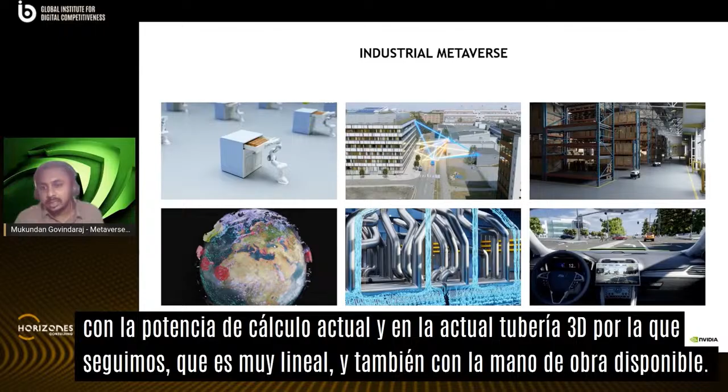So there is an immense need for accelerating the current 3D world creation process. The volume of 3D worlds that we'll be creating in the next several years is nearly impossible with the current computing power, the current 3D pipeline we are following, which is very linear, and the available manpower. We are spending a lot of our valuable time and effort on repetitive world-building tasks.

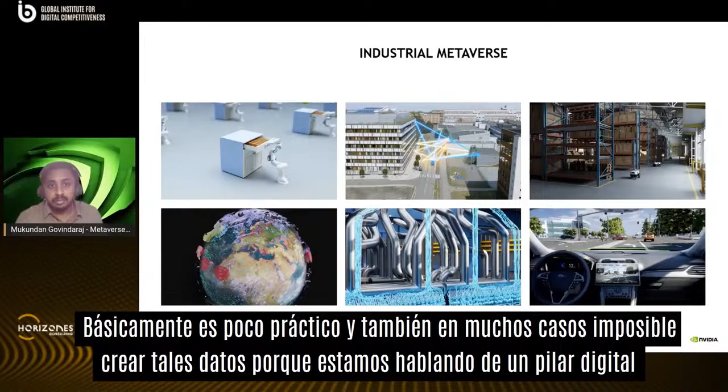Industrial AI also requires 1:1 scale, diverse, and accurate data in order to create these true digital twins. It's impractical and in many cases impossible to create such data, because we are talking about a digital twin where the foundation is not laid even in the real world. The only way to produce such data is by synthesizing it.

And for the AI to be really successful in creating this data, we need to train it in a virtual environment which is not only a visual replica of the real world, but also obeys all the laws of physics, to the extent that whatever you simulate in the virtual world will be a true replica, a true digital twin of your real world.

I would like to talk about the major challenges we are facing in the current industry, especially for those involved in building 3D worlds or digital twins. Firstly, we have already shifted towards a hybrid working model where a lot of us are working remotely and most of our teams are spread across the globe. We are in dire need of collaborating seamlessly like we would in the real world.

The 3D process by itself is a very complex process. People who are working on it, I'm sure, can relate to it.

The process is linear, which means you start with modeling, then texturing, rigging, animation. The file has to go through literally several departments before it can be handed over to the developers. And then when there are feedbacks and changes, you again have to take it back to ground zero, start making all the changes and then pass it on. So this is extremely time consuming and it burns a lot of energy.

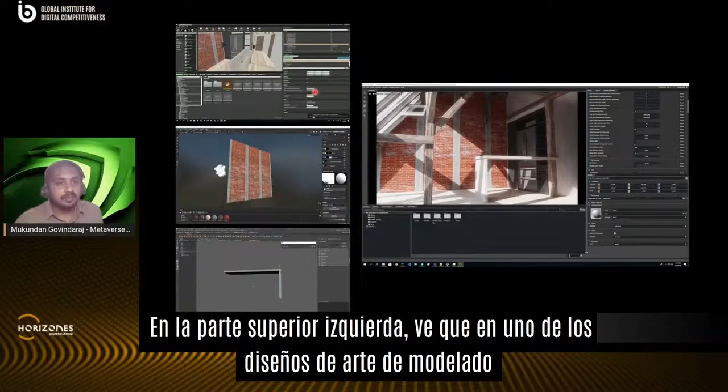Here is a quick video which will give you some insights on how real-time collaboration would work. On the top left, you see one of the modeling artists, a level design artist who is working on setting the levels. And right here, one of the texturing artists is using Substance Painter to create some beautiful artwork. And beneath that, we see one of the modelers who's creating a model on the fly.

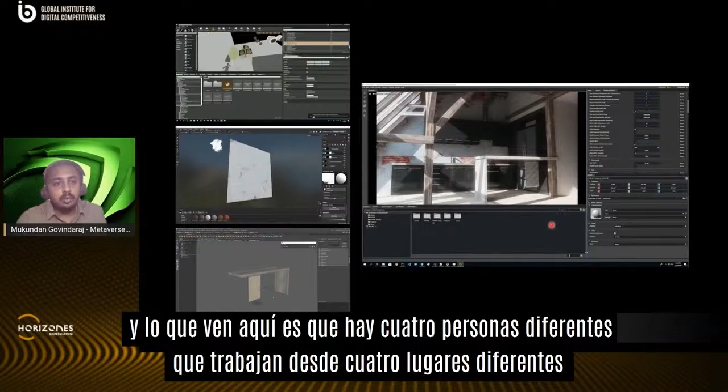Right here, the entire level designing and the lighting is taken care of in Omniverse Create. What you see here is 4 different people working from 4 different places using 4 different tools, but all the interaction and collaboration happens seamlessly. Which means it's saving a lot of time, and also boosting creativity to a different level.

Again, Kit is nothing but a powerful SDK. There are already a lot of solutions which you can use out of the box. But if you feel that there are some specific needs for your current 3D pipeline, and you want that flexibility to go and build a new feature.

Not to worry, you can simply go and start using Omniverse Kit, using which you can build an extension or a microservice, or put a lot of extensions together and create your own application. So this is a very interesting and very powerful modular kit which is available, and you'll see how powerful it is only when you start using it.

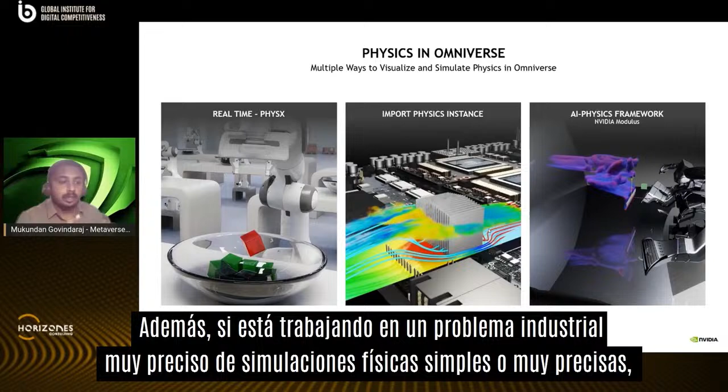So when you talk about physics, there are actually three different types. One is your real-time physics engine. Also, if you would want to import physics from different physics engines that you might already be using, some engineering physics engines, yes, you can also do that.

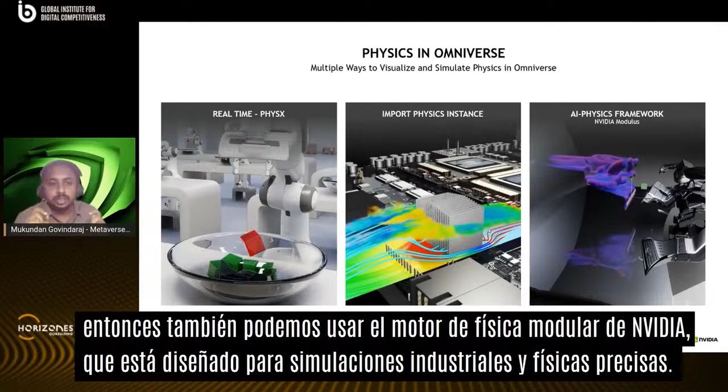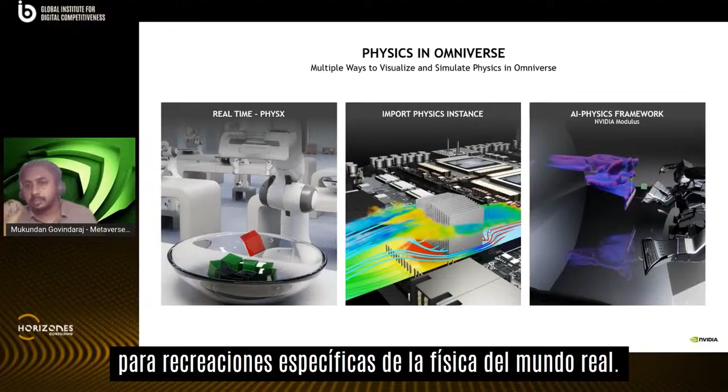Plus, if you're working on a very accurate industrial problem, which requires very accurate physics simulations, then you can also use NVIDIA's Modulus physics engine, which is built for industrial accurate physics simulations. It's very highly graphic intensive, but also very highly accurate, and a lot of clients use it for specific recreation of physical real-world physics.

So if you look at the basic physics engine, you have three types. You can work with rigid bodies or soft bodies. Plus, you have PhysX Blast, which lets you play with fracturing and disruptions. And also using flow, you can create volumetric effects, which includes fire, smoke, blast, and a lot more than that.

So once again, RTX renderer is a scalable photoreal real-time renderer, built on NVIDIA RTX tech. It's a renderer built to simulate a world as faithfully as possible, while also providing scalability to the users to increase quality. And also, you can run it across multiple GPUs at the same time, which cuts down the final time to deliver to you.

We can talk about it in detail, maybe as a follow-up session. So look, out of the box, we have a couple of apps which I would like to talk about.

We have a lot more than that, but these two powerful apps will come in really handy if you want to get started with Omniverse today. Go and download Omniverse Create, whose main purpose is to build beautiful worlds. You have a lot of free assets, materials, and lighting options, with literally about half an hour of a learning curve if you already have prior experience in DCC or game engines. With less than half an hour, you can start building some really beautiful scenes. It's that powerful, so I'd highly recommend downloading the app and playing with it.

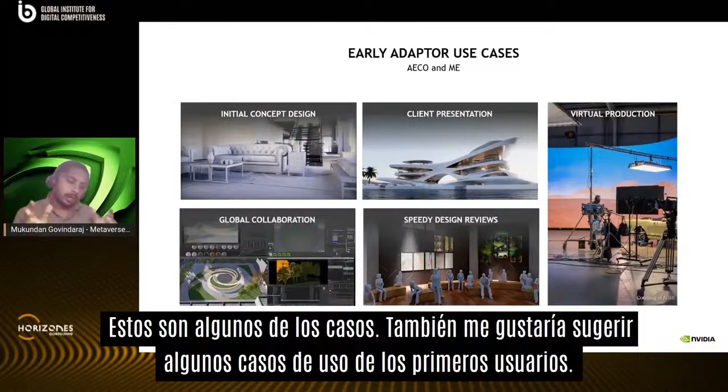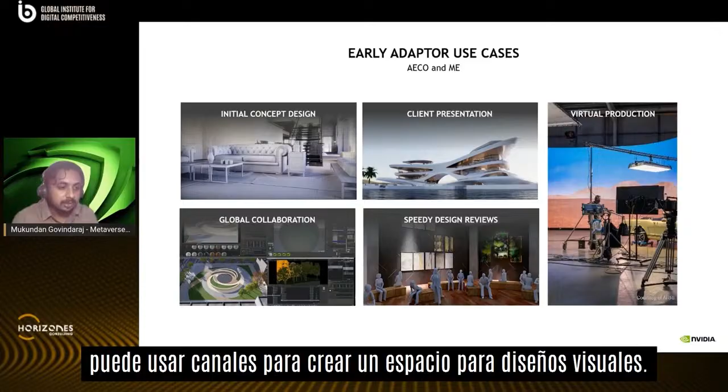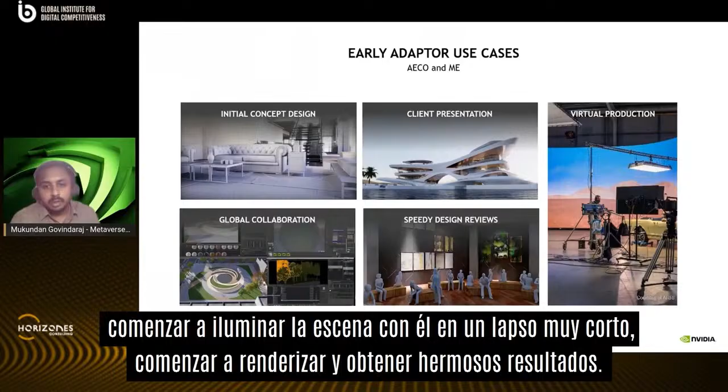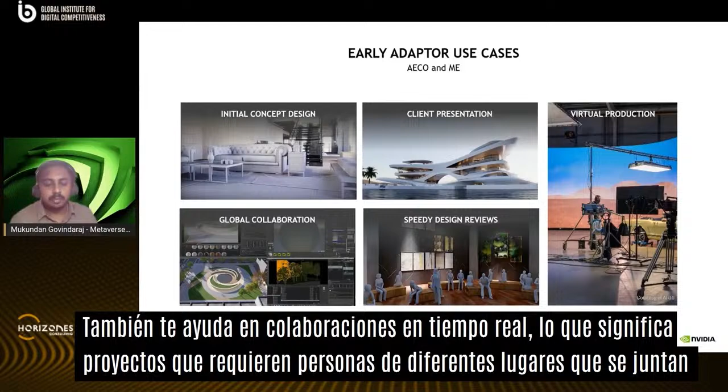Before we go into the use cases, I'd like to suggest some early adopter use cases—what you can do with Omniverse Create out of the box, for early beginners. You can use Omniverse to create a space for visual design while working on product design or architecture projects. You can simply import your models, start lighting the scene in a very short span, start rendering, and get beautiful outputs. It also helps with real-time collaboration, meaning projects that require different people from different places to come together on creative jobs—you can use Omniverse for that as well.

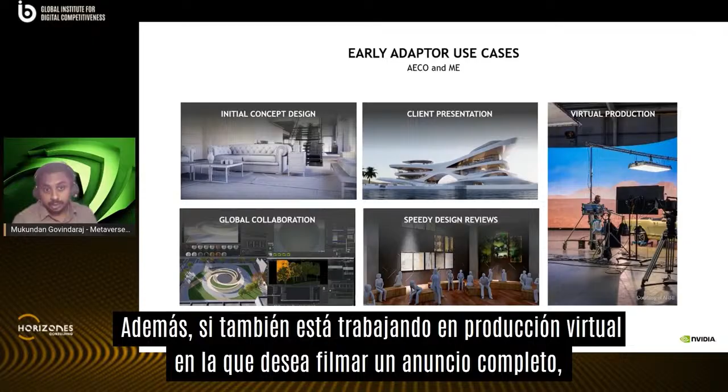For design reviews, it comes in very handy. Plus, if you're working on virtual production—where you want to shoot an entire ad or even a movie—you can start using Omniverse Create, which gives you all the power to do virtual production.

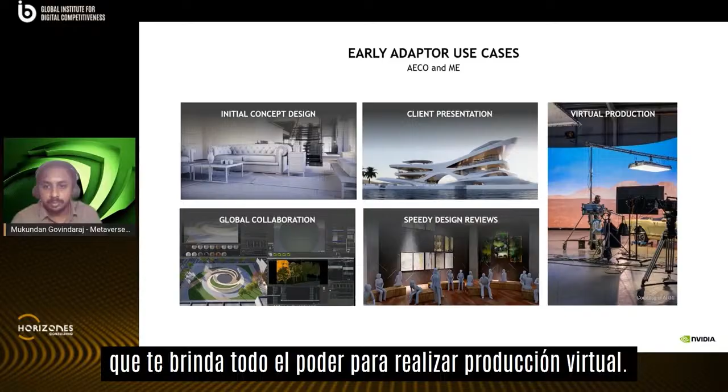The potential to improve the creative process through all the stages of the VFX and animation pipeline will be highly transformative.

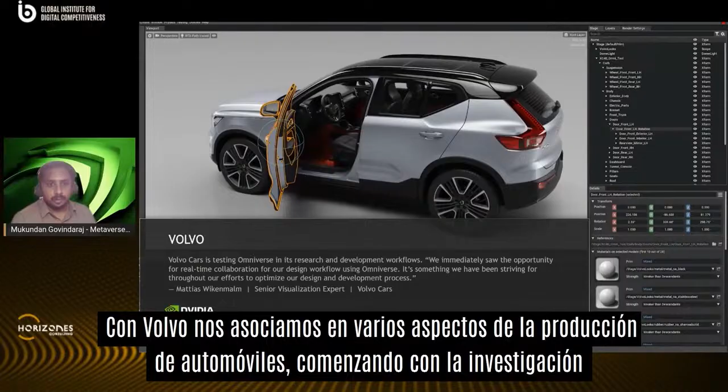With Volvo, we partnered in various aspects of car production, starting with research and the design of the car itself. This was a very successful use case for us, and we also realized we have much more need for collaboration and photorealistic output during the design phase.

DNEG is another VFX giant in the world with whom we're partnering, simplifying and looking at how we can boost the efficiency of various stages of production.

This is actually giving a lot of power for the animator, because when I'm working on an animation with a model like this, I may not be able to feel how it would look after it gets rendered out, since we're only animating the skeleton and visible mesh. But on top of it, we have a coat of hair which is completely ignored in a play blast. We also have another layer of interaction on top of what we can show real time, where you control the lighting, the environment, the camera angle, so that as an animator, I get super powerful perks in my hand so my animation looks more real. I don't have to work on the blind spots, so I'm saving time and channelizing my efforts onto the camera angle I'm actually going to see in the output.

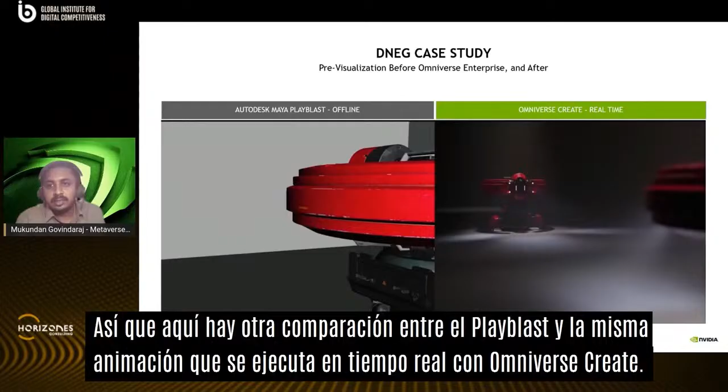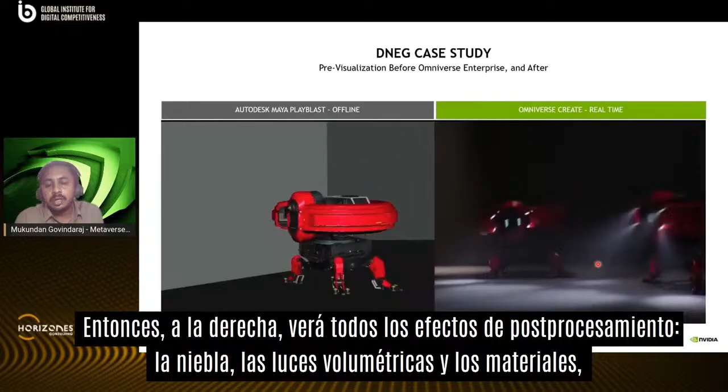Here is another comparison between a Playblast and the same animation running real time on Omniverse Create. On the right, you see all the post-processing effects, the fog, the volumetric lights, and the materials take on realistic lighting. As an animator, when I get to see this output while building the animation, it gives me more decision-making power, and my output is also very well optimized.

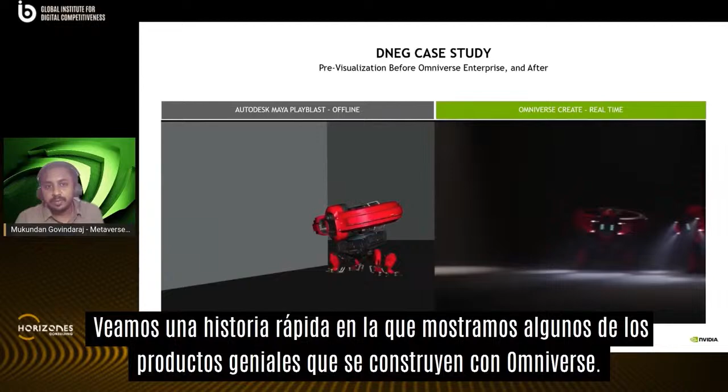Let's see a quick show reel where we showcase some of the cool products that are built using Omniverse.

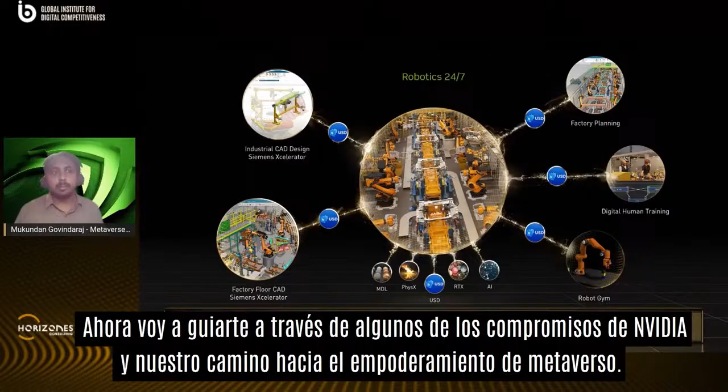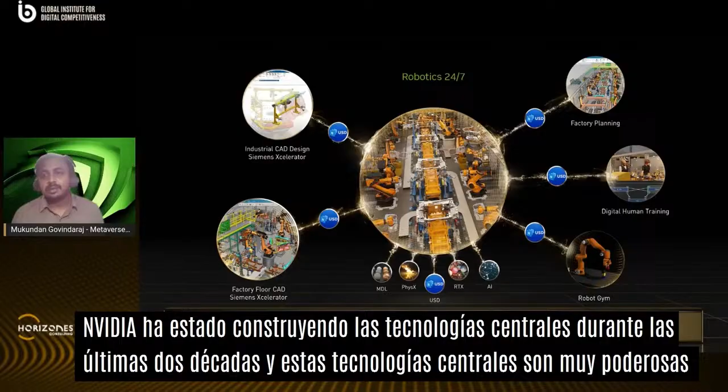Now I'm just going to walk you through some of the commitments from NVIDIA and our path forward towards empowering the metaverse. Metaverse requires a robust and powerful computing platform to support linking the digital and physical worlds together. NVIDIA has been building these core technologies over the last two decades, and they are already empowered by NVIDIA's high performance computing platforms from edge to cloud.

NVIDIA is committing to launch very powerful tools under the umbrella of neural graphics, which intertwines AI and graphics together. As I mentioned in the beginning, we need more machines doing all the world building for us. Some examples of neural graphics include neural VDB, which is another powerful format, much more powerful than OpenVDB which is available now. You'll also be able to churn beautiful simulations at almost 1/10 the size, plus 10x the visual advantage.

We're also talking about StyleGAN, which would be very helpful in creating photoreal humans. Also, you must have already tried Instant NeRF. Instant NeRF is another cool offering from NVIDIA, using which you can create a visual replica of the real world with just a few photographs. You can take some 10 pictures of yourself and create a 3D version of yourself seamlessly in a very short span of time.

We will definitely continue to throttle more on the power of USD, and we'll also keep launching a lot more tutorials and creating awareness of the power of USD.